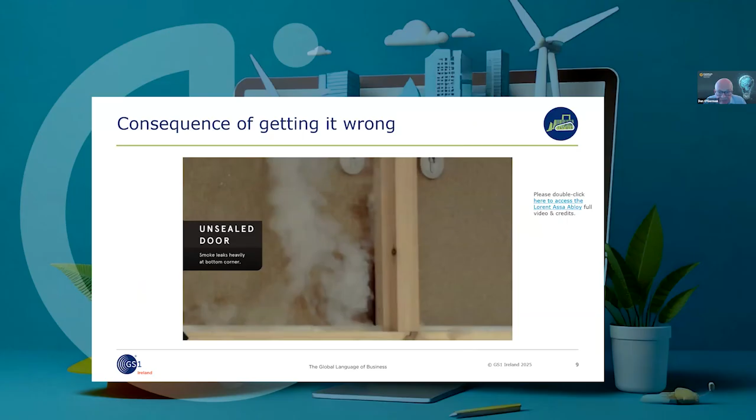The consequence of this, as you can see on this video now, the door on the left-hand side, you can see on the right-hand side of the screen, it'll come up in a second, the timer. In 19 minutes, you can see the door on the left is not approved. This is the consequence. Now, if this was a 60-minute fire door requirement, the door on the left has failed. The door on the right has met the specification. And that specification is not just what the designer comes up with, but how it's installed, because the consequences, as you can see on the left-hand side, are severe.

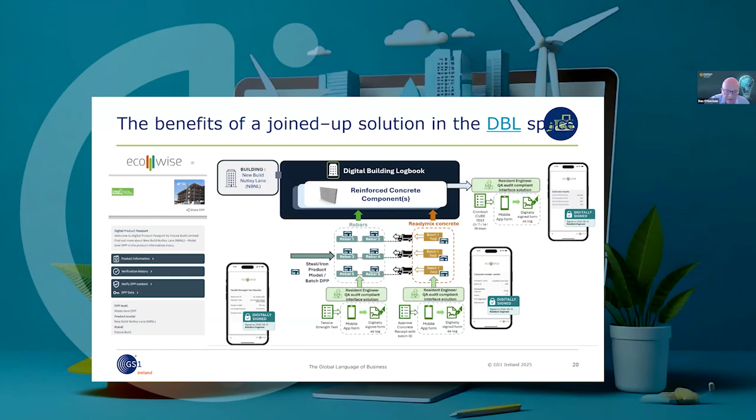Brilliant. Thanks, Dan. That's great. And look at showing things practically, how they work as well. Using technologies with standards to streamline processes, make them more efficient, but make that information so accessible, and the right level of information available to the right people at the right time. And that's what it's really about.

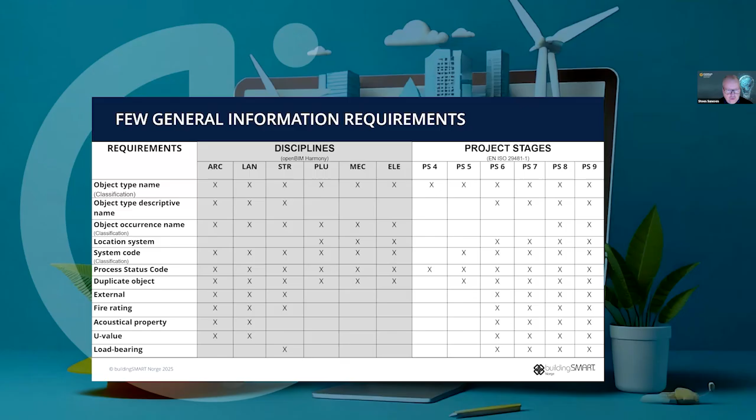When it comes to the information requirements, looking at the alphanumeric information requirement, you see on the left side of the screen the maximum number of requirements. There are 12 information requirements. It does not apply to every discipline or project stage, or even to each object class. And some of them, as you can see, are specified according to classification, but there will be different ways to do this in different countries. But we have simplified a lot, and that is really the point here, to make it as simple as possible. And using these very universal information requirements supports a number of BIM use cases.

So OpenBIM Harmony is not really meant to be used off the shelf in a project. It's more like a toolbox for a chapter. As you may remember, I said buildingSMART Norway has already made an implementation of that. So it's actually meant for chapters to assess and make their own versions. There are things that you should adopt and not change: the basic principles I just told you about from ISO 19650, the document structure, so it will be recognized across clients and projects, and also the information requirements as much as possible.

But of course, there will also be things that have to be adapted, language of course, but there will also be national or even company-level classification used for identification, and there can be national standards, regulations and practices, naming and so on, that you need to either add or change, so it becomes relevant for your industry and your industry's needs.

So it was published in March this year, so it's very new. This is the team behind it. It was not developed by buildingSMART International. It was an inter-chapter work between these four countries: Portugal, Benelux, Denmark, and Norway. Benelux is a chapter, actually. Yeah, it's three countries: Belgium, Netherlands, and Luxembourg. So it's more countries, but four chapters.

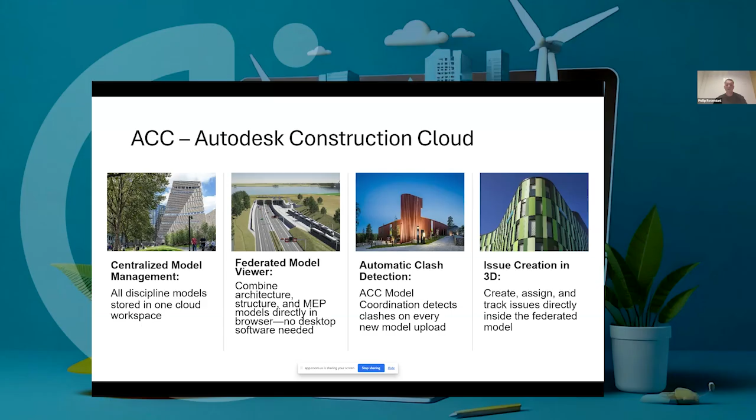So within ACC, we can create the federated models with the different discipline models that we are using in a separate project. And also inside ACC, we have the automated clash detection to make sure that we can see clashes in the early stages of the project, and also be able to create issues within ACC to communicate to every different party who's involved in the project from the early stages.

So inside ACC, we can combine all of the different formats that we have deliverables in throughout the project. So if we have a Revit model, we can live link all of the other Revit models which are being worked on in a project, and we can live update the models to make sure that we can adapt to any changes which are being made inside the model.

So some of the main modules that we are using inside ACC is Docs, for the documents of the project. There are different ways we can share the project or align access for different parties within the project. So we can share and communicate live between all of the different parties in the project.

We have a Design Collaboration module, which we are using throughout the design of the project. So we can communicate about clashes or issues within the project, and we can pinpoint in 3D models to show where some issues can be, and there is a history of the communication within the project.

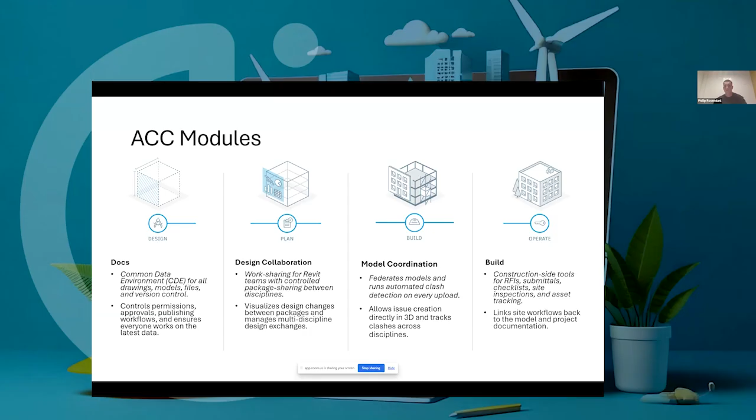And there is also Model Coordination, where clash detection is being made live, and we can maintain data within the project and see it throughout the design phase to make sure that everything is done as we wish. And then there is a Build component that is also included in ACC, which is more when we go to the site. So we are able to control RFIs, submittals, checklists, site inspections, and assets within the project.

So I'll just quickly show what we are doing. I have 2 different projects I can show. So this is the Docs of a project where we have all the different models. If this was a project where we are working in Revit, we have folders for every different discipline in the project. Right now this is a tender project where we have different models. Here we have both Revit and IFC models, which are being updated throughout the project, and other parties in the project are able to link these different models.

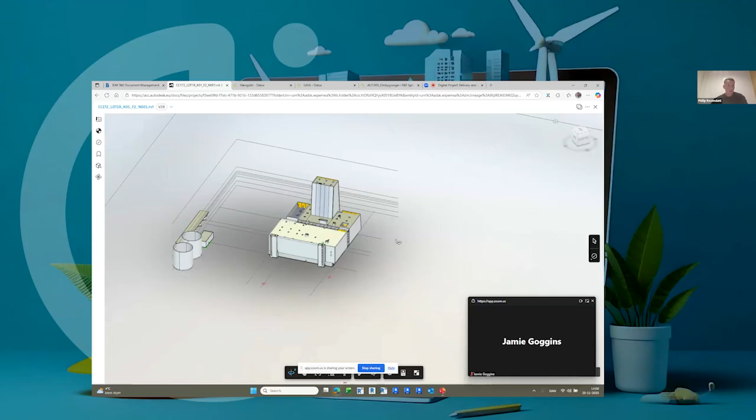So here you can see the architecture model, and this is being updated weekly in the project, so everyone is able to go in and see the updates in the model and what has been changed. Right now in this project, we don't have the compare function, so I'll just show another project, because this is a project that's far along in the process.

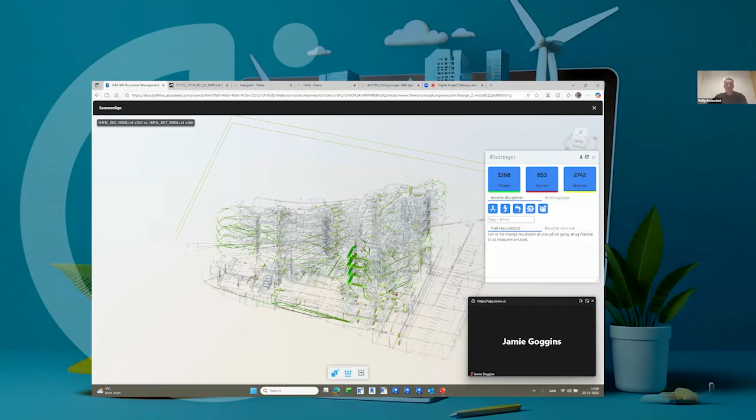So in this project, what I've done is I've compared 2 different versions. I've taken an earlier version of the model and wanted ACC to tell me what has been changed between these 2 model versions, and I can sort by what changes I want to look for. Is it changes in the geometry? Is it changes in the data within the object? I can sort on whether something has been changed, removed, or added to the project.

So we can follow the process, and the project leaders or the ones who are not deep inside the Revit modeling or the software can use this directly in the browser.

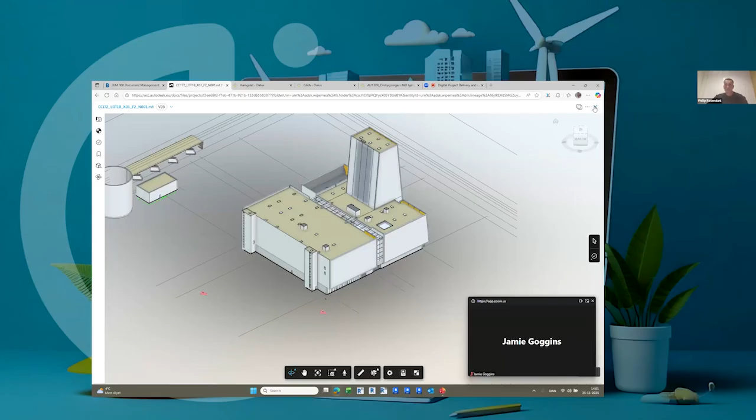So yeah, that's the document module. We have many different options here for sorting out what we want different parties in the project to know, and we can give different tasks or put them into different packages to make sure that only the specific person we want to have the information will get it.

And we have further modules down here, as I mentioned, where we can coordinate the design throughout the project. For example, this is the model coordination, where we can see clashes through the weekly publishes of the model. So, for example, this is set up between the different models that we have in the project, and I can click and see what's the clash between those two models, and then I can assign the issues directly to a person that is responsible for that specific collision.

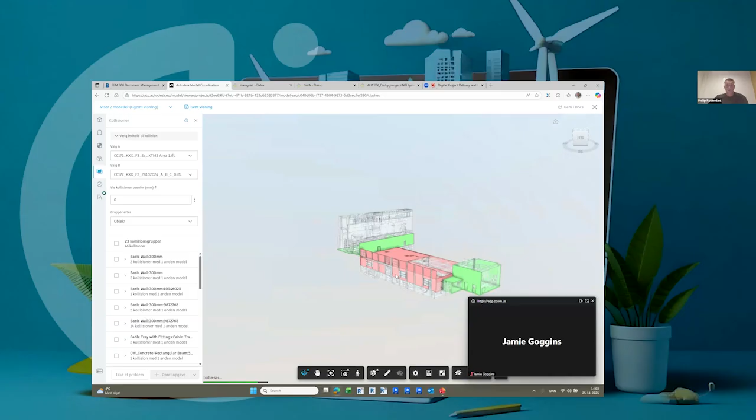And through this, I can also create a report to say that this and this and this you need to solve by this date. And when they open the report, they can go directly into ACC and see what the specific issue is, both in 3D and what my comments, deadlines and so on would be. And hereby we can also see the history of the communication between members and reports that follow how it's been solved. And the last one is the build module that I mentioned.

So this is more for the site. Here we can create RFIs, or we can see checklists, site reviews and so on, to follow the process. Yeah. So another software that we're using is Dalux. Dalux is more for the site. It's more used for when we have delivered a project after design, but it's also based on all of the models that we are delivering, IFCs, Revit files, and other 3D geometry like point clouds and so on that we can deliver in the project.

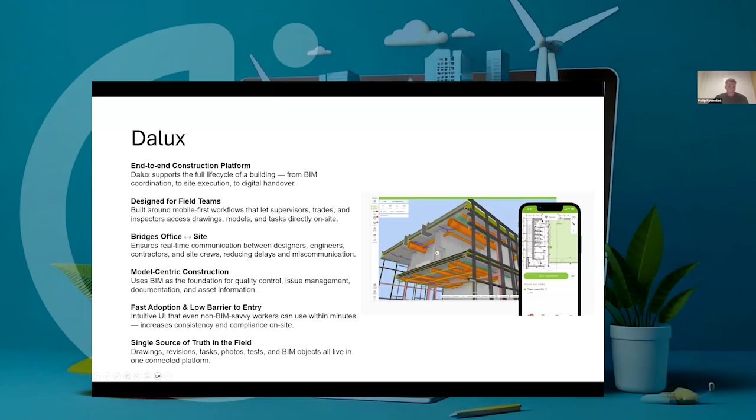So the different modules that we have within: there is Location, where we have all the 3D models combined, so we are able to see what specific component we're talking about. We have a site walk function within, and we also have augmented reality, so you are able to open models on site, go to a specific place and see the 3D model in real time. And we also have Field, which is where we can make RFIs and requests for stuff that we need on site.

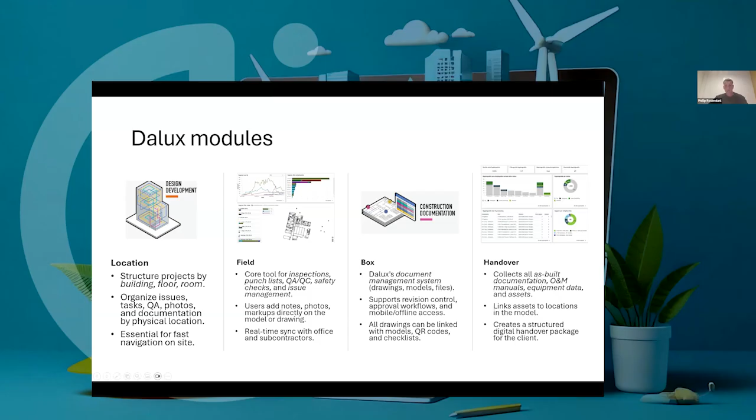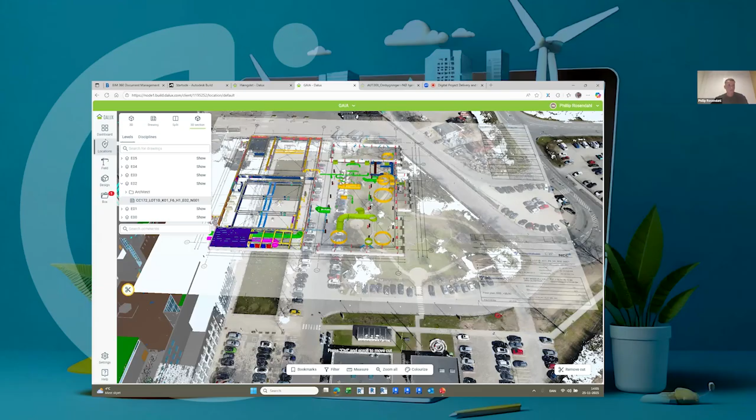There is a Box function where all of the documents used on the project and delivered are kept. And there is a Handover module where we make sure that all of the deliverables and assets and so on are done correctly. So yeah, Dalux looks like this. For Location, this will be from the models that we have uploaded within the project within Box that we give access for.

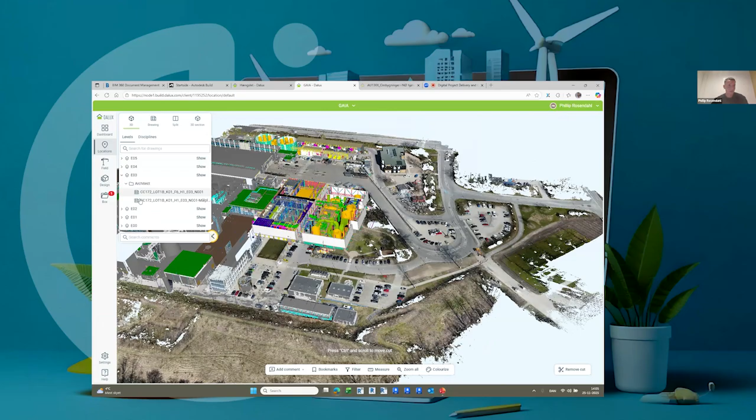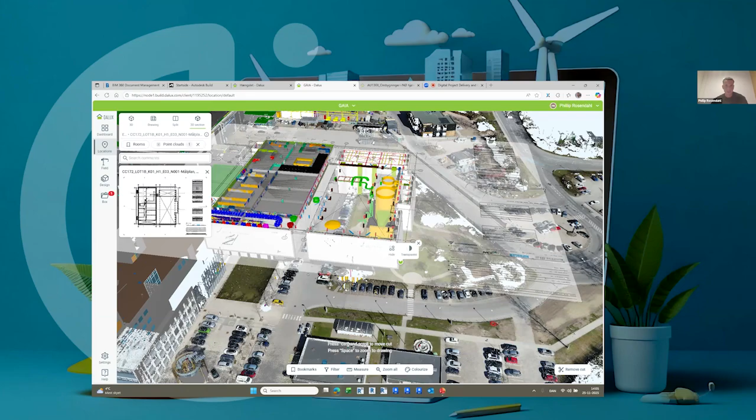So right now I've just loaded in the point cloud, and there are different ways that we can look through the building. We can say, okay, we want to see a specific plan, or a specific plan within 3D, and we can sort out all the different kinds. We want to see a specific model or some specific area that we want to look deeper into. Of course, we can also split up the building and mark up different things that we need to look into. And also this is more site related.

So I'll just quickly jump to the other project, but yeah, Field is more for stuff that we need on site. As I mentioned, site walk, some captures that are done on the site. Then Design, where throughout the design we are able to mark up and tell all the vendors about stuff that we need from them, or they can use specific 3D models to request some information.

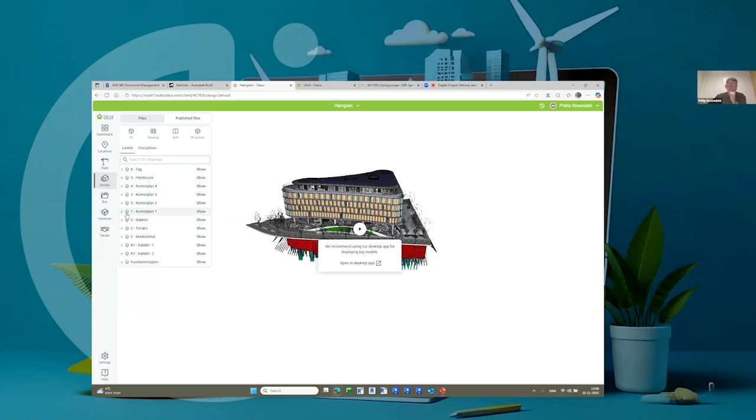Yeah, and Dalux is also very easy to use because we have all the different modules that we are able to deliver in. So there is an overall file component where we can put all of the files, and then we can split them into version sets and publish files. So we can arrange who gets the specific information throughout the project, and meeting modules and so on. So we are able to have an overview of all of the history throughout the project. I think that's mainly it.

Brilliant. Thanks for that. That's great to get a run through the practical applications in ACC and Dalux, with some real projects, showing how you guys use it in Ramboll.

So there's lots of questions here for presenters. I know Ralph has been busy in the background there answering some of those questions. So I'm just conscious of time.